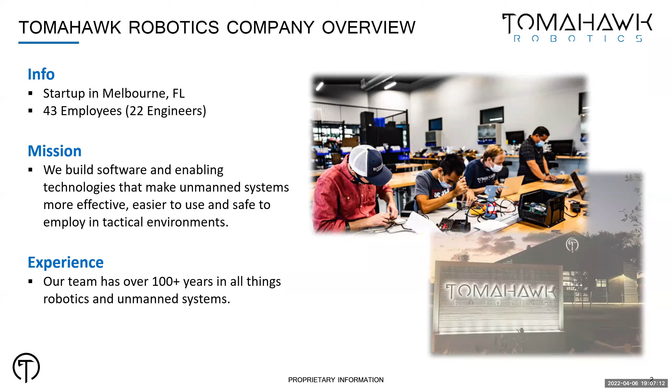The capability sets are very siloed. You'll have the large robot there with 8 wheels, its capability is to just carry stuff behind the soldier. Maybe the next one is just for reconnaissance, and the middle one as well. The other one is for handling IEDs and explosive devices. The one on the fixed wing aircraft, the Puma, is mainly for long range reconnaissance.

But each of these are operated with different controllers, and this is just a mix and match. These aren't exactly the controllers that each of these use, but it gives you a sense of how bespoke and disconnected each of these controllers are for each of these platform types. And today these are bought, that controller for that vehicle for that capability, so on and so forth.

The problem is that statement across the top there, where the way we engage in combat, future forces want to have more lethality using unmanned systems within the dismounted unit. Which means a foot soldier carrying capability on his back, and he wants to be as effective and efficient as possible operating that equipment. So the Tomahawk solution is one application, a single application that controls all the vehicles the same way within the single app. Some of the issues that arose that we're seeing now in defense with the bespoke procurement method is, of course, size, weight, and power.

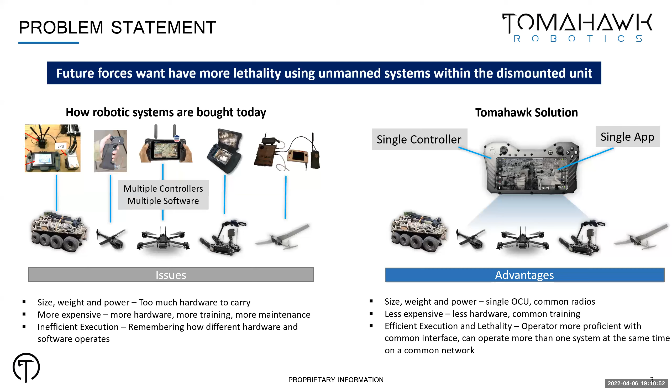I guess that's probably everything on this side here. Let me do the next one.

So some of the things we're going to cover today is basically how we're going to achieve that overall operating picture and some of the other hardware and software elements we have in our architecture to achieve that all-in-one operating picture, as well as be able to bring in AI and machine vision, machine learning type capabilities on the loop between the operator and the vehicle in this common architecture.

As I mentioned before, all of this is achieved with one single control app called Kinesis. This app basically allows for the solution of battle space networking, and this is the biggest problem that we found as we started to look at controlling different vehicles all simultaneously.

I guess one thing I didn't mention a couple slides ago is not only do we have a single controller with a single piece of software, but we're also able to bring all those different robotic platforms in different domains, air, ground, or sea, all into one common operating picture on one common network. So the networking piece was probably one of the bigger pieces we had to solve to allow that to talk to each other.

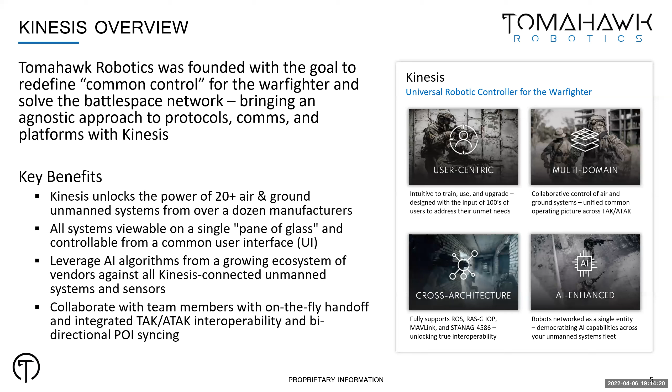But in addition to that, because it is essentially a computer, a very high power computer in a very small form factor, it gives us the ability, because of a lot of the hardware acceleration and GPU capabilities of this processor, to add aided target recognition through semantic segmentation and different AI techniques for classification of different assets in the real-time video coming from all these devices.

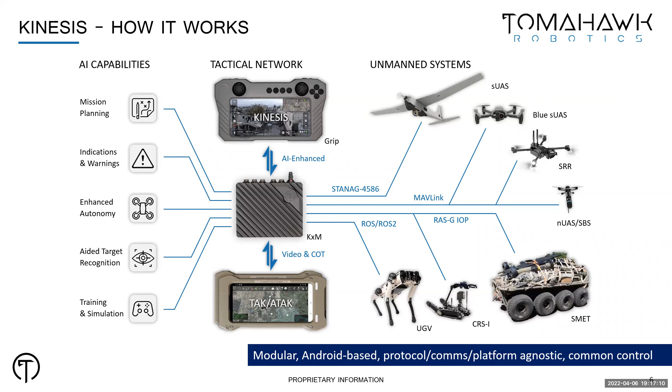It can sit in the middle of an urban area and look straight down, providing overwatch of vehicles coming on different streets. Let's say somebody gets out of a vehicle and starts to head off one way. Another user on the squad, since all the users and vehicles are networked together, could take this small drone and go follow that person, being very covert about where the drone is versus the person.

Maybe that person sets a suspicious device down next to a door, maybe a bomb or something like that. Then a third operator on the network could take the CRS-I robot, which is a small EOD robot, and go drive out and investigate that.

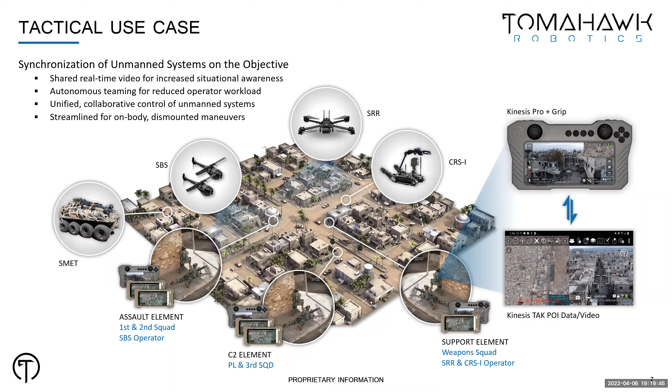Off to the right you can see a depiction of sharing some of that data from one of these user devices across ATAK, being viewable across the team, or up echelon to a command center, to get an idea of what's going on. There are n number of different scenarios you can arrange with our architecture, but this is probably a more complicated one as things are run today, and a good example of what's achievable across this common network with one piece of hardware, one piece of software, from a control standpoint.

Most of our customers view any one of these assets as really a sensor in the field, or a sensor downrange. So at the time they go execute their mission, everything's set up, and if there are advanced settings, that's done ahead of time. When they're operating, they just want things very slicked down, very decluttered, with the most important information right there in their face.

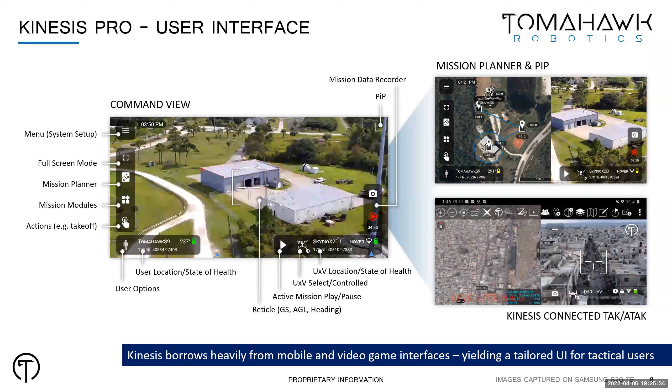And so since we already have this on-body compute with that NVIDIA processor I talked about earlier within the KXM, the users can go and run - it's powerful enough to run the simulation environment that we've created using Unreal Engine, Epic's Unreal Engine, to basically allow them to practice using these different kinds of platforms, both air and ground platforms.

It gets them reps at using and clicking around through the user interface and getting acquainted with that. And we're getting to a point where we're starting to write mission profiles for actual training. So if somebody were to get sold off on our system, they would be able to do this kind of mission, this training module, in which they achieve certain goals, and then they could get things checked off as they achieve them, so they could show their superiors that they've gotten trained.

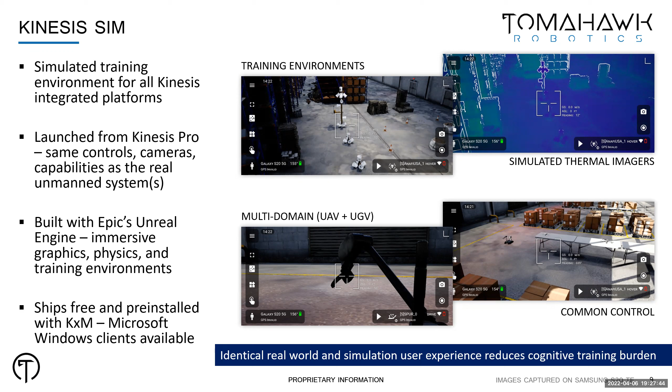It's very much mapped like an Xbox controller, kind of ABXY, 2 joysticks. The shape of it is very intentional to allow the user, when they hold this thing, to be able to put their thumbs up there and not occlude the screen. That's kind of why they're up and wrapped around like that.

What you don't see in this picture, there's 2 bumpers on either side, 2 buttons that we provide there. Open architecture interfaces, USB-C to charge it. The phone actually powers the buttons and everything, a little microcontroller in there that powers and runs everything in the controller. Then there's a cable that comes out the side that allows you to connect into tactical hubs and other external devices such as radios and what have you, to be able to control the vehicles. That's one of the controllers we have.

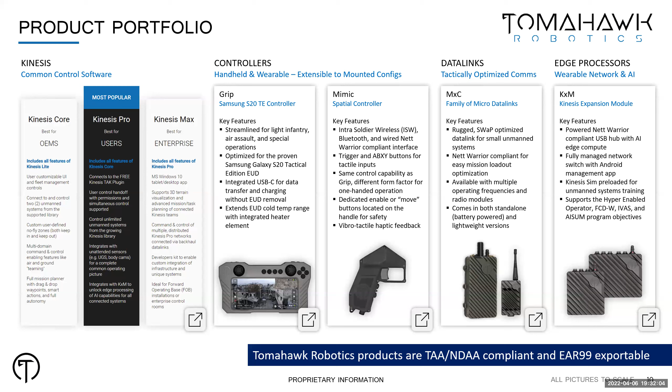On here, so I mentioned before, the topic of this slide package is AI-enabled common control. And really how that's achieved is with this KXM, right?

The KXM, as we saw earlier, sits in the middle of all these data streams that are coming in from all these different robots. We've created an architecture on the KXM that utilizes Docker containers to go and run these different capabilities that, frankly, we don't make.

Then we can actually take all of those results and put them all together onto one image that we then spit back out to the user. And of course, we chain those images together to create full motion video.

So the result to the user is the ability to see multiple outputs from multiple different kinds of tracking algorithms. You may have one company that's really good at finding tanks, another one that's really good at finding trees, and another one that's really good at finding cars.

You could put all three of those together operating simultaneously to give you a resultant of 3 different hitboxes on 3 different things, from 3 different companies that spent their time training those different neural nets or what have you. So we've set up this architecture to allow the expansion of these other capabilities that we, as Tomahawk,

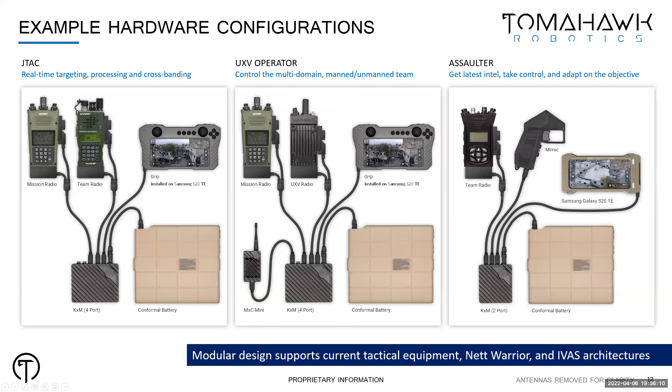I also have some pictures for if our customers want to develop their own software, or need to connect with just generic devices. We also sell cables that would plug into KXM to allow generic USB-A, USB-C interconnectivity within our system. It doesn't have to use the military standard connectors you see in this picture off to the left.

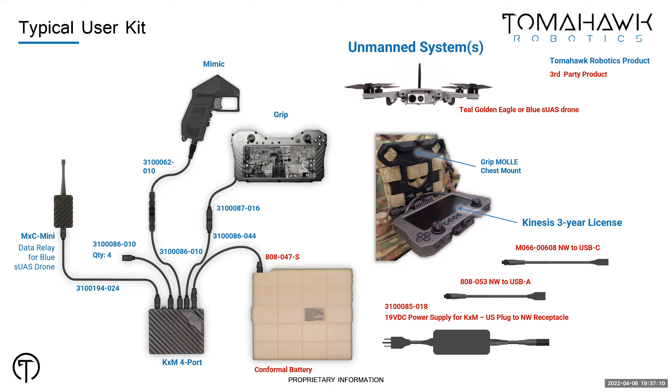We have a tiered system, which whittles down into different capabilities - what things you can do with the platforms, and where we are as far as integrating those capabilities throughout our architecture.

The challenging part of the speed and agility of our business is we'll have customers come and say, hey, the XYZ vehicle, I see you have that on your roadmap, and I'm not going to get that capability until beginning of next year, but I have money now, we need this now, we have some operational needs, we want to pay you to move that in - and then I have to readjust my whole development plan to account for that and move things out in time.

So we're very agile and Scrum-based as far as our software development, trying to react to customers' needs and streamline our automated test processes to support this agile approach and guarantee these systems will all continue to work together as we upgrade and add more capabilities to them.

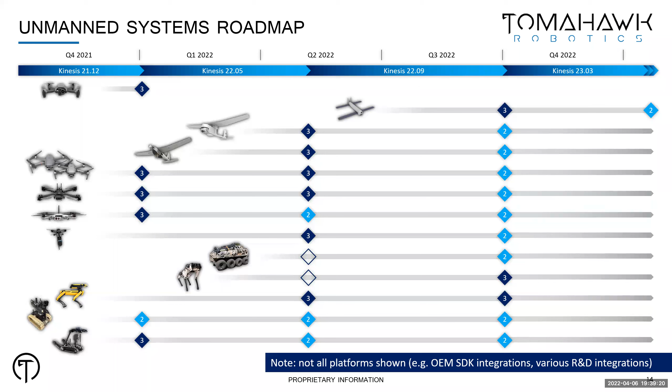This picture, frankly, every month looks different, but as of a couple months ago, this is kind of what it looked like. And I think, Brent, that's kind of all I had. I know I said a ton, so I'll turn it back over to you to take it from here.

Outstanding. Thank you so much, Scott. That was...

Amazing. One of the things that I know - consistency is absolutely important to support utility and really wide scale adoption, and you've created a very impressive product that helps to establish uniformity across operational domains. This is, to me, somewhat new and novel, where you see an operational UI that can support ground and air, and I assume at some point in the future maritime might even be on your list. Yeah, it very much is in the works.

Outstanding. Exposure to this type of design set - this is one of the reasons I put these sessions together. It can help our students further understand functional capabilities, which hopefully then translates into them being able to brainstorm new uses of unmanned or uncrewed robotic systems.

In regards to advanced robotics and uncrewed technologies, what are some of the most recent technological advances or breakthroughs that you personally find exciting, and why?